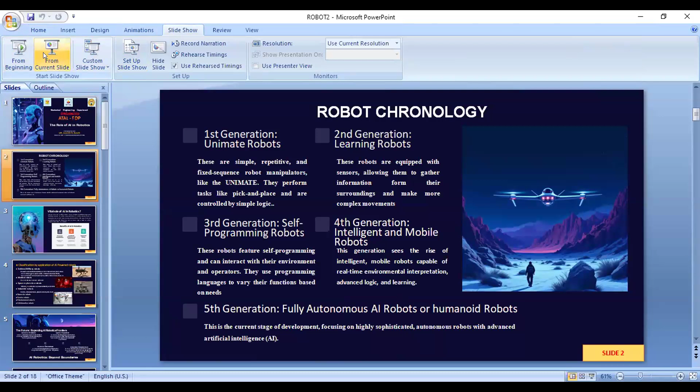In second generation... just one. Hello sir, can you start full screen mode? Yes yes, just one minute. Now is it visible? Yes sir. Okay.

Now in the second era, robots are equipped with sensors, different sensors and actuators. These robots are generally used for tasks like welding and assembly, this work can be performed by these robots.

In the third generation, robots are programmable, in which the robots are self-programmable and operate as per the environment requirement, or they will be able to work with different programming languages.

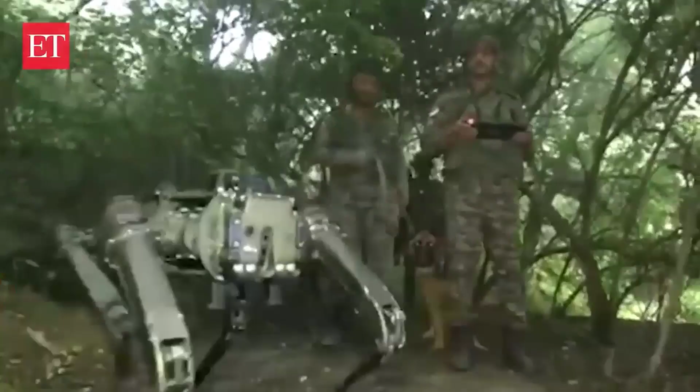I'll give one example: India has recently developed a MULE robot made by the Indian Army, and they conducted one mission. This mission was done in Jammu and Kashmir, where these robots were used for surveillance purposes. These AI robots can visualize in 360 degrees, and they are able to communicate with other robots. These robots even created a map of where terrorists or these people are located, so the military can easily find out the terrorists and make attacks and take action on them.

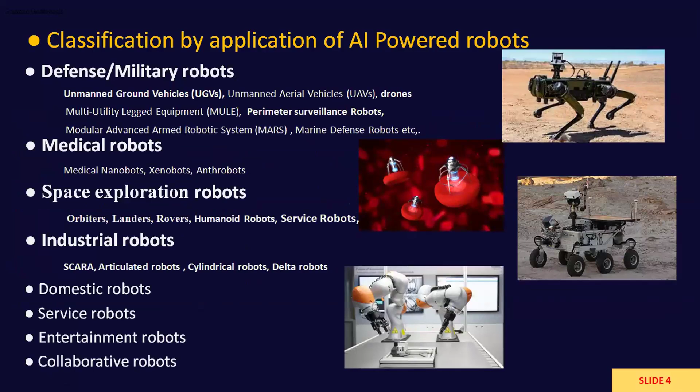This can be done easily by the Indian Army due to these AI robots. These robots that we have seen, called MULE, stands for multi-utility legged equipment. The Indian Army's multi-utility legged equipment surveillance robot uses several AI technologies to enable autonomous and semi-autonomous operations.

Okay, so this is the benefit of AI robots. Even the drones over there can easily make a map of particular areas.

So AI, how AI will be beneficial in military, I have shown in one figure over there. So drone swarm coordination means if you have different drones, suppose 5, 50, 100, 30 drones, they can communicate and coordinate with each other.

Signal analysis is also there. If signals are sent by one surveillance robot to another, or to your central system, that can be easily analyzed. Signals from the enemy can also be caught easily and traced to their stations.

There is object detection and tracking, meaning if there is any object that is different than required, like machines or weapons, that can be easily detected or tracked.

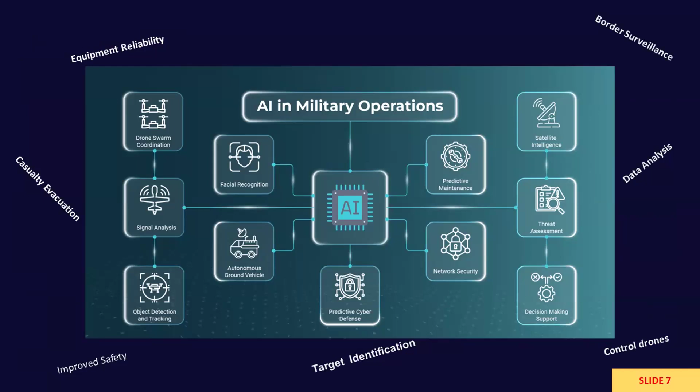And the major thing we'll see in future PPTs is how AI will work in space missions. It is also an important topic we'll cover next.

Now, use of AI in medical. We have already seen that there are three types of bots used in the medical field, the first one being nanobots.

Nanobots are robots made of synthetic material used to create this type of bot, and they are programmed accordingly.

As per the program, they are used for delivering drugs, or for making small operations. These use a top-down manufacturing system, meaning one bot will automatically sense the signal or command it has received, and as per that, the other bots work with it as a team. Typically, nanobots are from 0.1 to 10 micron in size, very small. They measure the area to do different operations with the robotics, and drug delivery is a major application of this robot.

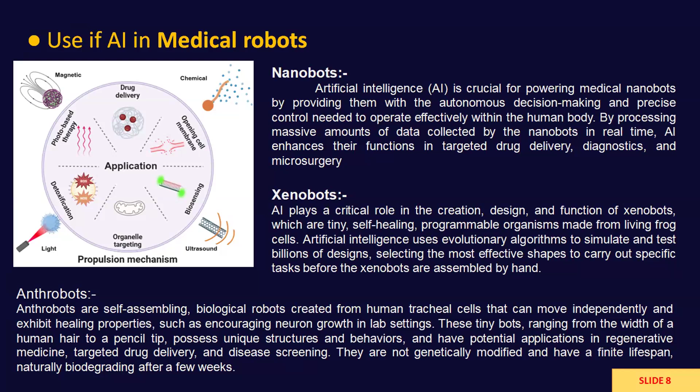Now, as we have seen these two fields, there is one more field where AI robots are majorly used: space exploration. Recently, you may have seen that the Galactic Gearheads robot was developed by some Indian students, from the Pune Institute of Computer Technology, PICT. They won the robotic challenge organized by ISRO, on the topic 'Fly Me to the Mars Mission'. So they wanted to...

...use a LiDAR sensor, or Light Detection and Ranging sensor. So what they did was make one platform about 50 meters by 30 meters, and created a landfill-like mass there. Whatever drone they created, called the galactic gear, works with that LiDAR sensor. Using that sensor, it doesn't need to be controlled through a joystick or program. That AI sensor can directly detect where it should land and from where it should take off. So these things can be done even without needing GPS - that can be done automatically using AI.

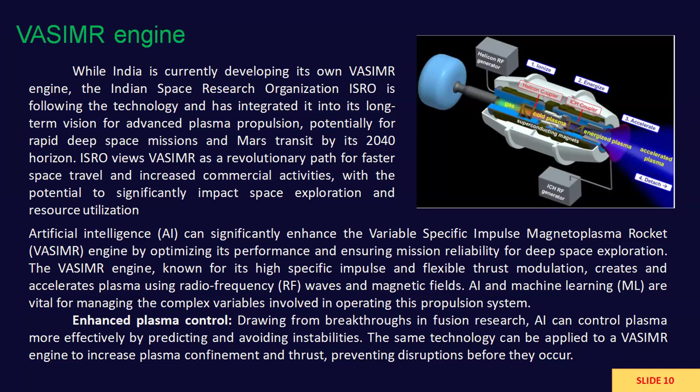Then there is one more thing, ASAT. Many countries are also developing ASAT - it is one type of missile. This missile is called the anti-satellite missile. Many countries like India, China, Russia, and US have developed this type of missile.

It is meant to destroy this type of missile - the anti-satellite missile. This type of missile can directly destroy, from a ground station, any aircraft or even a satellite. So use of ASAT is very useful in the future in the condition of war. ASAT can neutralize the enemy satellite using communication, navigation, and surveillance, disrupting their military operations.

The one drawback of ASAT is this: ASAT generates a large amount of orbital debris. If it destroys the satellite, the rocket will also get destroyed at the same time. At the time of this destruction, a lot of parts will be revolving in space, which is harmful for other satellites and devices in space. So this is the use of these two things in space.

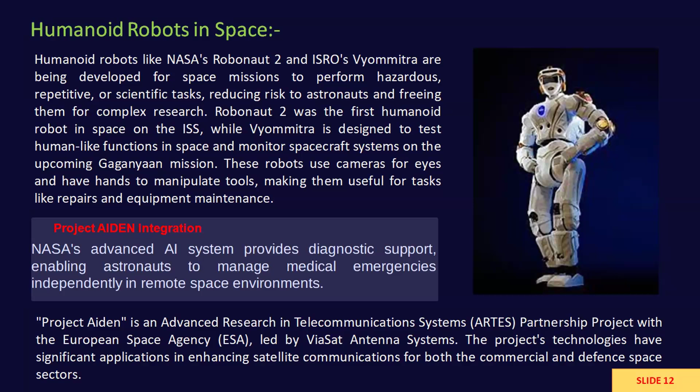Now there are some industrial robots which are regularly used. We have seen the industrial robot, the SCARA robot, which is a Selective Compliance Assembly Robot Arm, the SCARA robot. Then there are articulate robots and cylindrical robots.

Articulate robots work in 6 axes; they can work in 4, 5, or 6 axes. These can be easily used for assembly lines or different tasks. Then there are delta robots.

These types of robots are very useful while working in mines or submarines or in the seas. If there's a requirement, these types of robots can be used.

Now, cobots work combinedly with each other. If you've seen movies like the Rajinikanth movie, he developed robots that work as a team - that's cobots. These kinds of robots do combined work together when a task is very difficult for a single robot, so all the robots come together. Simply, I can give the example of a football match played by robots.

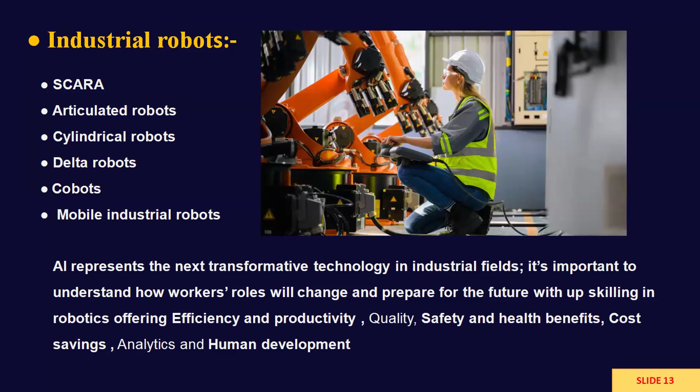Mobile industrial robots are used for transportation of goods and different things. So these are the uses of industrial robots and AI robots that affect productivity, quality, safety, health benefit, and cost saving. Initially, implementing robots in an organization has a very high cost, but compared to continuous work, that cost will be saved. In some places where humans can't work, robots can work easily.

Now, use of AI in CAD design. While designing a robot or any other machine, first we do the model using CAD. Up till now, modeling was done using the conventional way, but now AI has also been introduced in the CAD field.

Previously, if you wanted to convert an old drawn sheet into digital format, people would redraw that sheet in CAD software. Afterward, software emerged for raster to vector conversion - first you scan the sheet, then import it into vectorization software, remove unwanted data, and then there's a process of converting it to digital format.

We can call it a digitization thing. That can be done using previous methods, but while using AI, you just have to give that drawing to an open source AI software and it will automatically convert it into a CAD drawing. Just an example, suppose you have taken a photo from your mobile and convert that to PDF format. It is that much easy that your drawing, whatever it is, even hand drawn or an old sheet that you're having with you, just use AI, take a picture of that, and the software can easily convert that drawing.

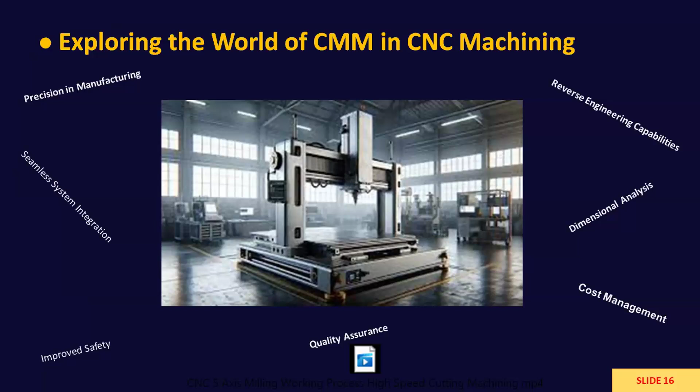So this is the benefit of your CMM and CNC machine with AI. Now, there are still some ethical challenges while using AI with all these things. There is the risk of cybersecurity, meaning there is a chance your data can easily be hacked or stolen by any other person. There is no way to prevent it.

Then there's ethical decision making. Sometimes what happens is anyone asks the AI system for something, so it will give its decision, whether it is fair or convenient or not. It will give its decisions over there. So it is very difficult to take the decision at that time.

Then even data security is there, which is difficult. There is no moral responsibility. Suppose any work is assigned to a person, what he says is, I haven't done anything, AI has done that thing. So there is no moral responsibility while you are using AI.

Then unsatisfied action. Suppose you want to ask the AI to do this thing or manufacture this thing, but it will give you something different as an answer. So many times it is difficult to get a satisfied result. Then responsibility and fairness are things we can control while using AI.

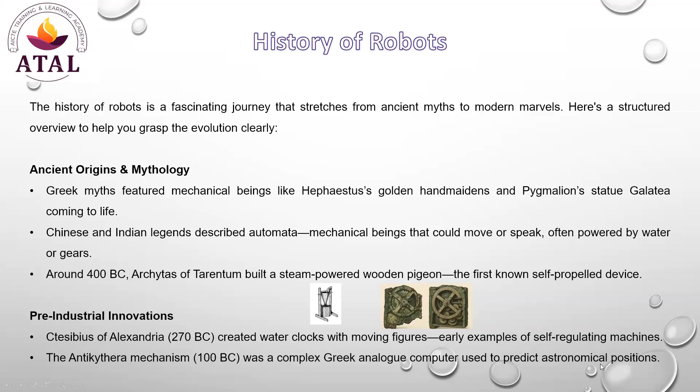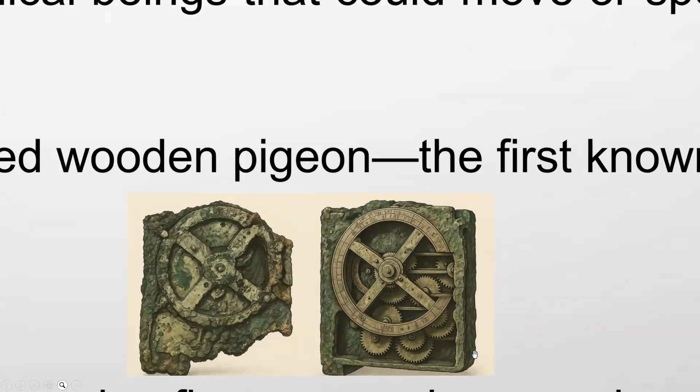The Antikythera mechanism, introduced around 100 BC, was a complex Greek analog computer used to predict astronomical positions. Here you can see that one. This is what scientists found at the time of digging, and they predict this might be how it was manufactured. This is used to calculate the years.

Then after that, in the time of the industrial revolution, the 18th and 19th centuries saw the rise of mechanical automata in Europe, clockwork dolls and musical machines. Meaning whatever we used to play with at our early young stage, the self-propelled doll that we used to play with after winding the coil in that machine.

Then there is an introduction of electricity and motors. With electricity and motors, the machines became more functional, which paved the way for industrial automation. In the 20th century, the word robot was coined.

It was coined in 1920 by Czech playwright Karel Capek in RUR, which is Rossum's Universal Robots, meaning forced labor - someone who is forced into laboring.

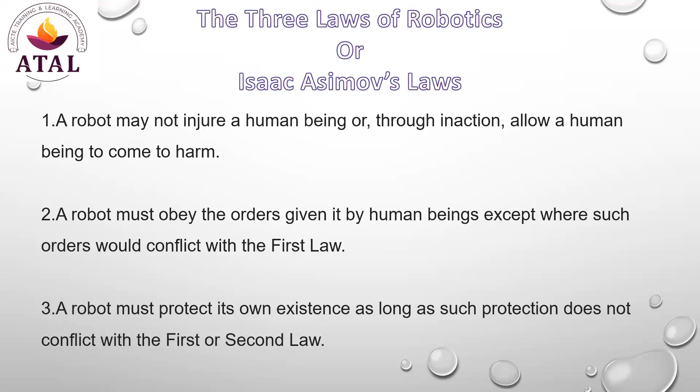The third rule is a robot must protect its own existence as long as such protection does not conflict with the first and second law. Meaning a robot must maintain its existence while working with humans, but it's not allowed to disobey the first and second law.

Then the first ever robot was made, which is not an industrial robot. There is a pair of robots known as Elmer and Elsie, which are electromechanical robots that are light sensitive. You can see here the light sensor part. It's shaped like a turtle, with a transparent cover given.

They were two electronic bots that were built in the late 1940s by neurobiologist and cybernetician William Grey Walter. They were the first robots in history that were programmed to think - they think and move according to the lights.

Elmer and Elsie were often labeled as tortoises because of their shape and the manner in which they moved - meaning it's a very slow robot, not very capable, but they move as per their thinking. They were capable of phototaxis, which is movement that occurs in response to a light stimulus, meaning they respond according to the light behavior.

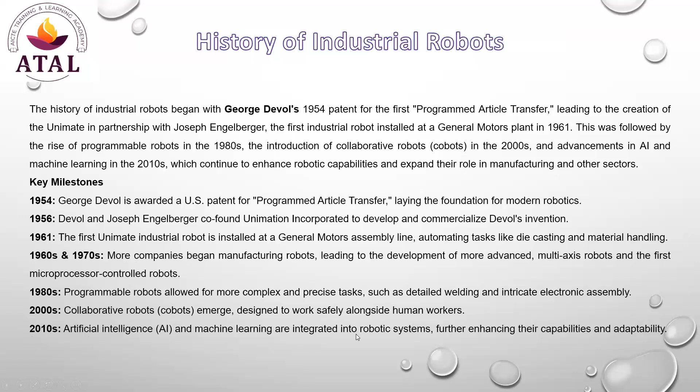In 2000, collaborative robots emerged, designed to work safely alongside human workers. In 2010, artificial intelligence and machine learning were integrated into robotic systems, further enhancing their capability and adaptability.

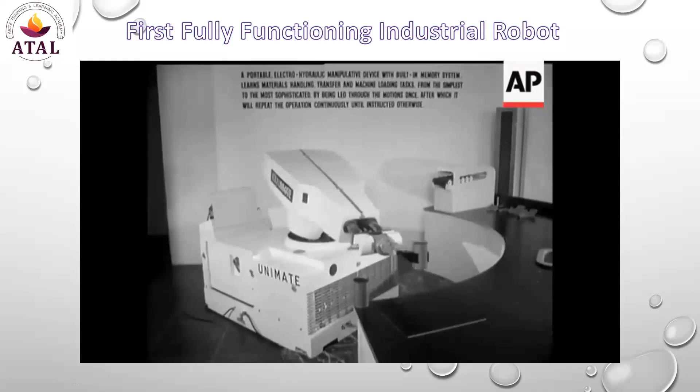You can see the video here. This is from the 1960s, showing the Unimate robot. It works on pneumatic motor control and hydraulics, without much deep electronics. You can see its work and precision, doing precise motions.

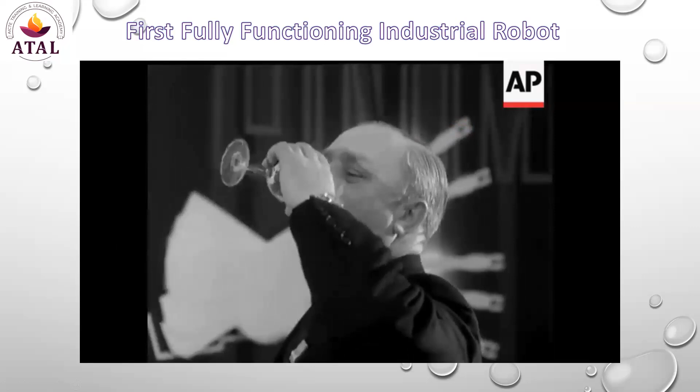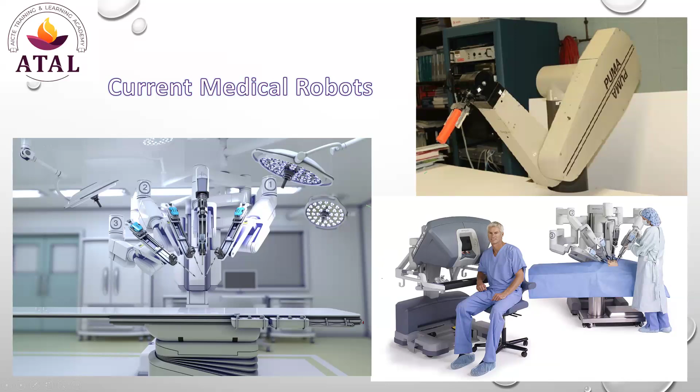And this is the Da Vinci system. Here you can see the Da Vinci system, which is used in the current industrial and medical era, and this is the Da Vinci system, which can be used remotely, meaning the doctor is on one side and the operation happens on the other side.

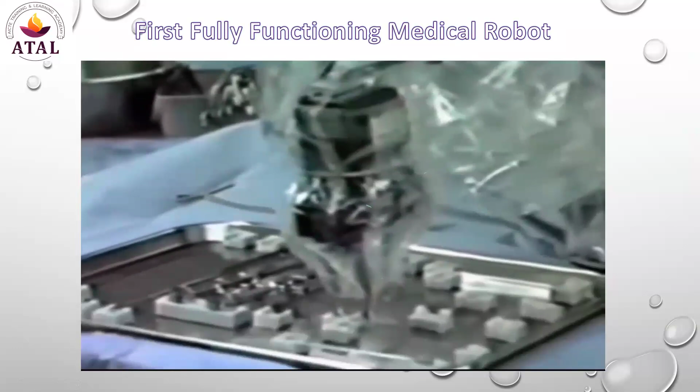You can see the robot is voice controlled. They call the tool's name, and that robot is giving the tool to the human.

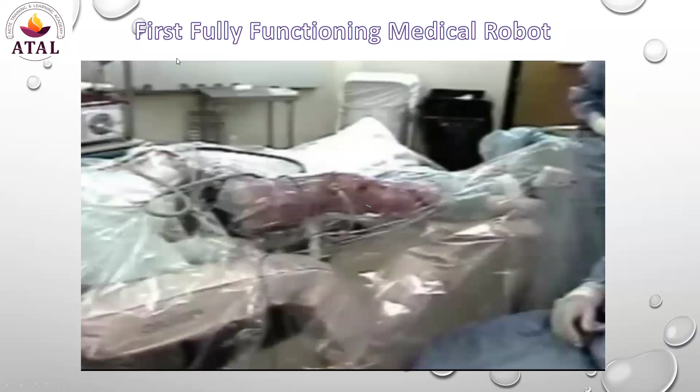Okay, then the current advancement in medical robotics: the world's first intercontinental remote surgery was recently completed over 8,000 kilometers, occurring in June 2024, when the Chinese

The procedure, which had a latency of just 135 milliseconds, was enabled by 5G network and fiber optic connections, allowing near real-time control of the robotic arm in China from the Italian capital. The groundbreaking telesurgery event demonstrated the potential for experts to extend specialized care to remote areas and is seen as a major step forward for minimally invasive surgeries.

The key details are: the surgeon is Professor Zhang Xu, Director of Urology at the People's Liberation Army General Hospital. Location: surgeon in Rome, Italy, patient in Beijing, China. Date is June 2024. Procedure is a live transcontinental remote robotic prostate removal. Technology utilizes a high-speed 5G network and fiber optic connections. It achieved a low latency of only 135 milliseconds, ensuring precision. Significance: marks the world's first successful transcontinental telesurgery, highlighting a new era for remote and collaborative surgery applications.

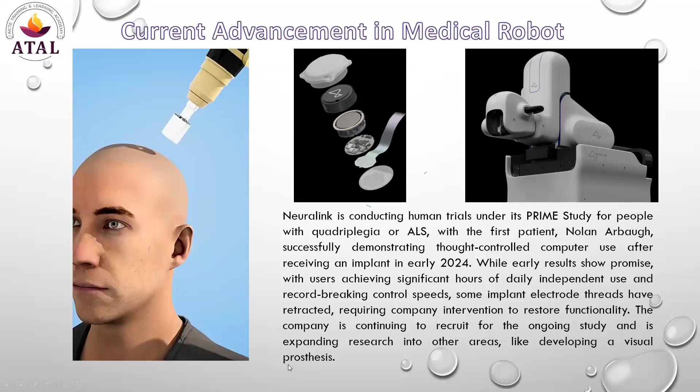with users achieving significant hours of daily independent use and record-breaking control speed, some implants' electrode threads have retracted, requiring company intervention to restore functionality. The company is continuing to recruit for ongoing study and is expanding research into other areas like developing visual prosthetics. You can see the video here.

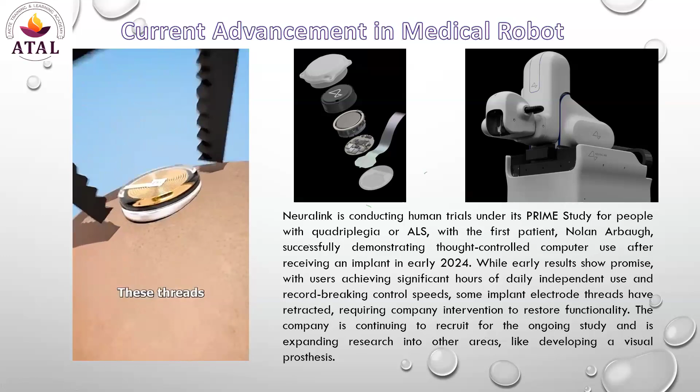This is a special robot developed for implanting these threads, which are placed near your neurons. So this is the robot used for that.

Then we are moving forward with military robots. The history of military robots is the history of defense robots, beginning with remote control devices, like Germany's World War II Goliath tracked mine, followed by the Cold War's CIA-funded aerial vehicles for reconnaissance. Early examples include the World War II Kettering Bug,

aerial torpedoes, and Soviet teletanks - these are the robots' names. Modern military robotics have evolved from these precursors.

With the 2002 war in Afghanistan, making the first use of ground robots like Hermes in a combat zone for tasks such as mine detection and cave clearing. Ongoing advancements focus on increasing autonomy, such as the 2020 incident where a Kargu drone attacked a human target in Libya, highlighting the complex ethical and strategic considerations of autonomous weapon systems.

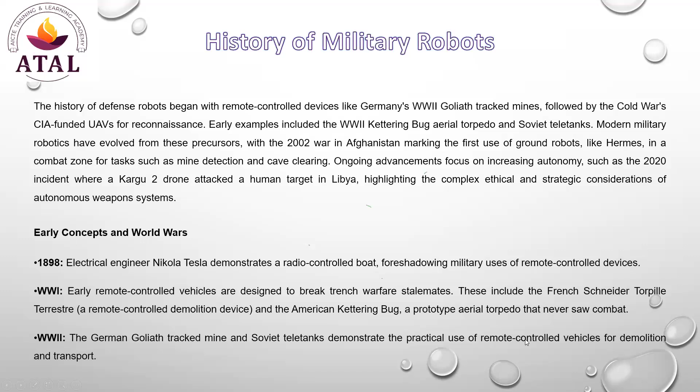In World War II, the German Goliath tracked mines and Soviet teletanks demonstrated the practical use of remote control vehicles for demolition and transportation. In the Cold War era, the CIA invested in the concept of unmanned aerial vehicles for intelligence gathering in dangerous environments.

The Firefly drone, developed in the 1960s, became the first drone to conduct significant reconnaissance missions. In the late 20th century, robots began to be used for support and reconnaissance, with ground robots like the MARCbot being developed for tasks such as bomb disposal. In the modern era, in 2000, the Hermes robot, along with other prototypes, made the first use of land robots in ground combat in Afghanistan.

In 2010, military investment in robots increased significantly, developing continuous advancement systems including unmanned aerial vehicles equipped with missiles and large ground robots with enhanced mobility. In 2020, Kargu-2 drones from Turkey reportedly attacked a human target in Libya, potentially making the first autonomous lethal engagement by a robot. Right now, the focus has shifted to developing more autonomous and sophisticated defense robots, raising ethical questions about their use in warfare and increased investment in this rapidly growing sector.

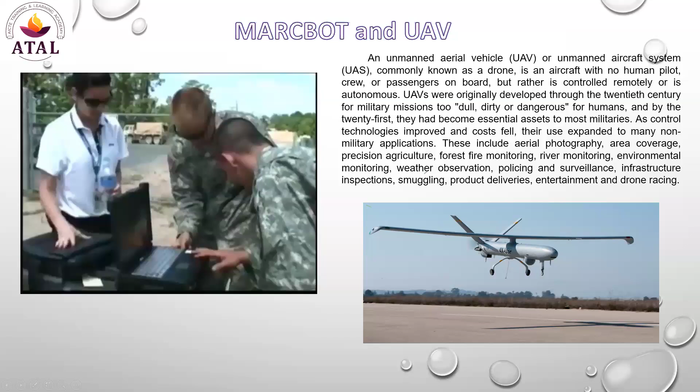An unmanned aerial vehicle system, commonly known as a drone, is an aircraft with no human pilot, crew, or passenger on board, but rather controlled remotely or is autonomous. UAVs were originally developed through the 20th century for military missions too dull, dirty, and dangerous for humans, and by the 21st century they had become an essential asset to most militaries as control technologies improved and cost fell.

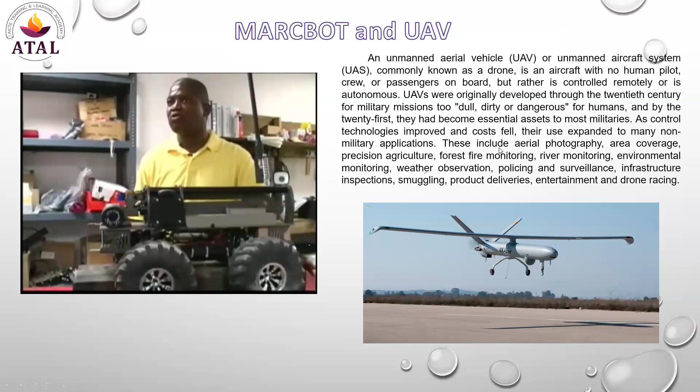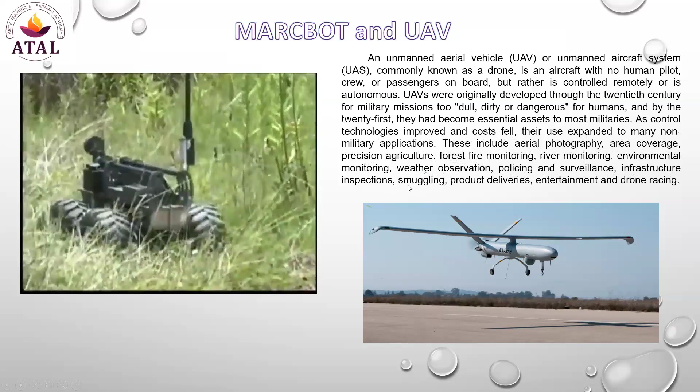Their uses extend to many non-military applications. This includes aerial photography, area coverage, precision agriculture, forest fire monitoring, river monitoring, environment monitoring, weather observations, policing and surveillance, infrastructure inspections, smuggling, product delivery, entertainment, and drone racing.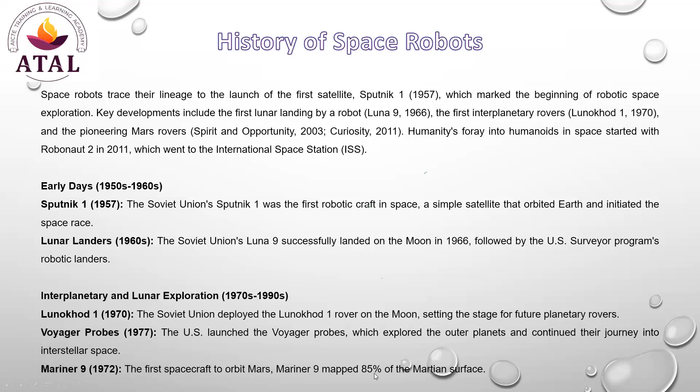Then interplanetary and lunar exploration from the 1970s to 1990s. In 1970, the Soviet Union deployed the Lunokhod 1 rover on the moon, setting the stage for future planetary rovers. Then the Voyager probes were deployed by the US, which explored the outer planets and continued their journey into interstellar space. Then Mariner 9 in 1972 was the first spacecraft to orbit Mars, and it mapped 85% of the Martian surface.

Then the Advance rover and the humanoid robots. The Mars exploration rovers in 2003. You can see this is the Spirit rover here, designed by NASA.

The Spirit and the Opportunity rover revolutionized our understanding of Mars by analyzing the rocks and searching for signs of water.

Then the Curiosity rover, which was launched in 2011 by NASA. The Curiosity rover continues to explore Mars, providing data on the geology and climate. You can see the second photo of the Curiosity rover.

Then Robonaut 2. This is Robonaut 2, the first humanoid robot in space, sent to the ISS, International Space Station, to test its capability and begin its life in space.

As a torso-only unit, they received the legs in 2014. The second version is a torso which got the legs. This is the half humanoid robot.

Then ISRO started working on the Vyommitra. The Indian Space Research Organization is developing Vyommitra, the female humanoid robot, to support human space flight, monitor modules, and interact with the astronauts. You can see ISRO's Vyommitra here.

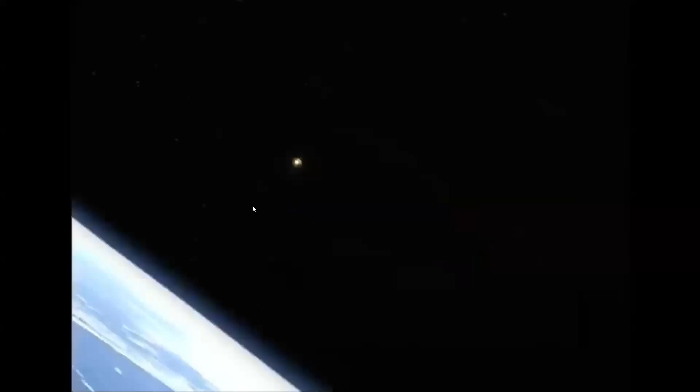So sir, as the first stage is removed, the satellite gets opened. Then it moves forward for another stage separation.

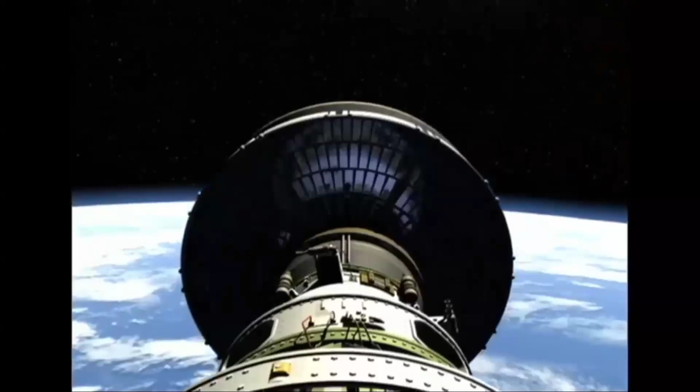Then after getting velocity, this satellite goes towards Mars. After 7 months later, the parachute and protection were automatically deployed.

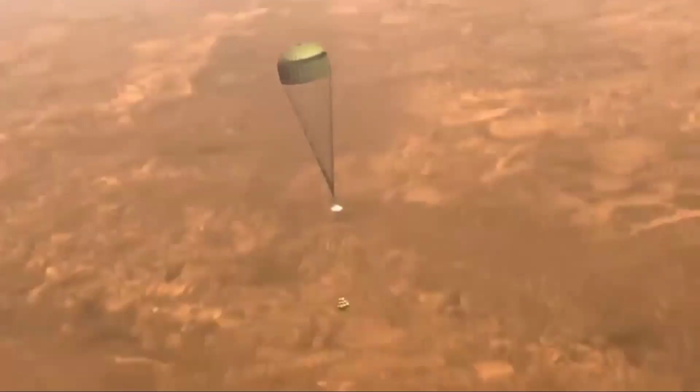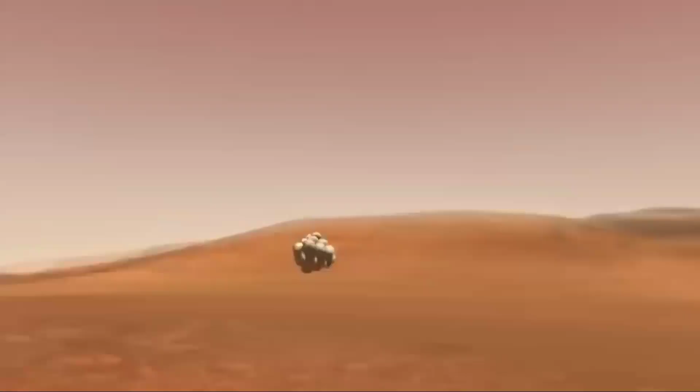From there, it started its journey. I am forwarding that.

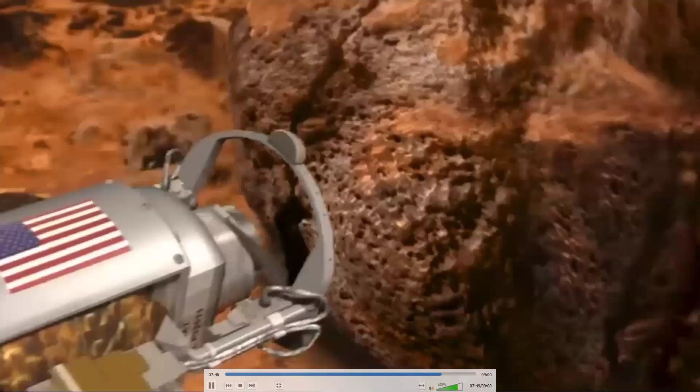There is spectroscopy, which is used for analyzing the contents in the rocks, what minerals are there. Generally, spectroscopy is used in industry for analyzing the chemical composition of metals and sheet metals.

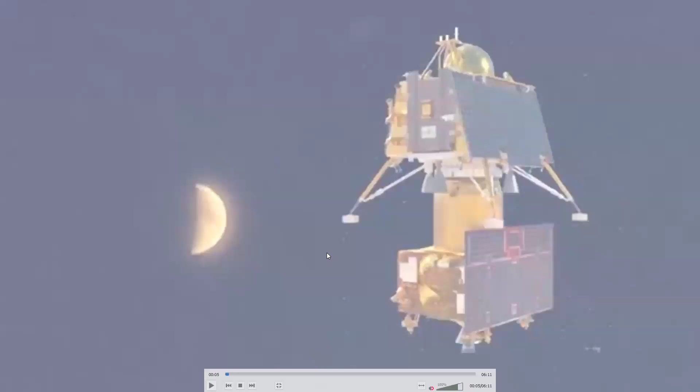Which is the Chandrayaan's landing video. Is it visible, sir? Yes, sir.

This is the landing of Chandrayaan 3, which we might have already seen on television. This is how Chandrayaan works and how it goes there, how it lands, how it projects itself to land safely.

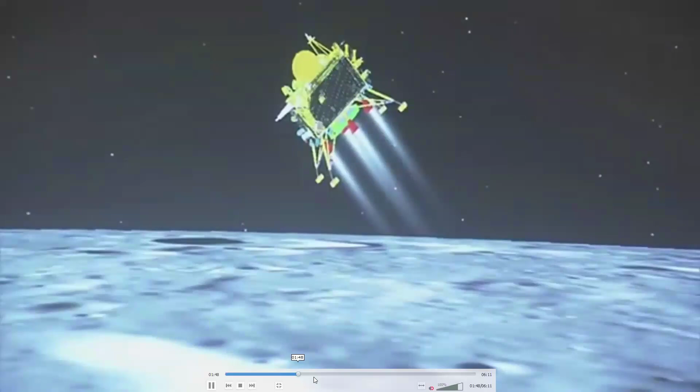Then this is the Chandrayaan rover, and this is their cabin. Chandrayaan scans the data available. These are the parts of Chandrayaan.

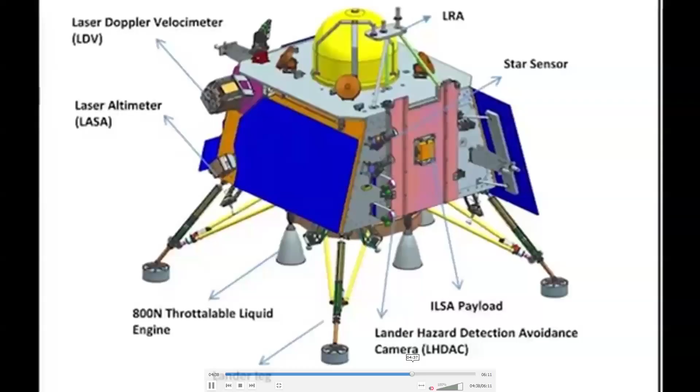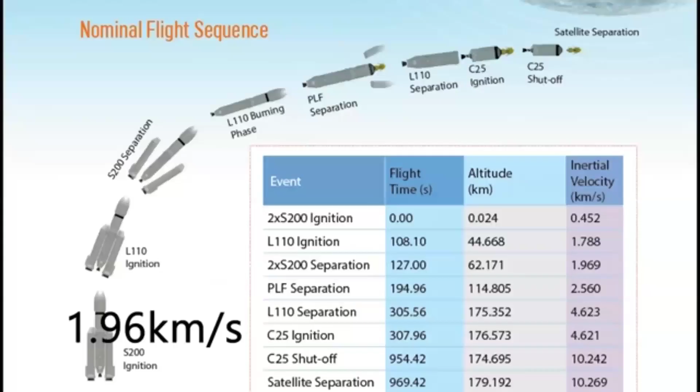This is the live telecast, showing the separation of the rocket stage, by the ISRO people.

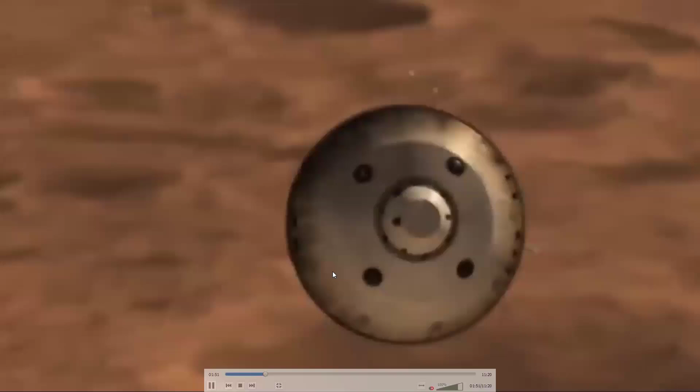This is the landing of the Curiosity rover. I have fast forwarded here.

This is the Curiosity robot by NASA in space on Mars.

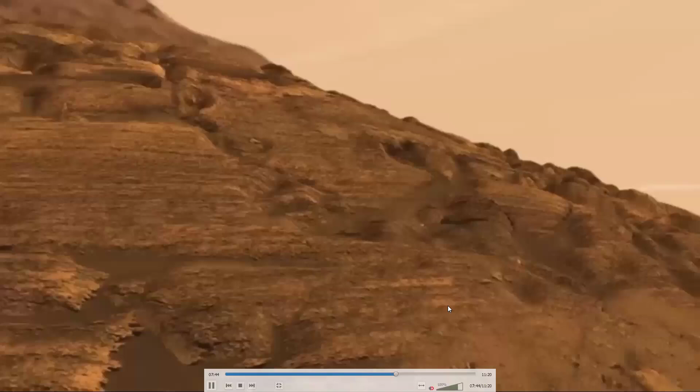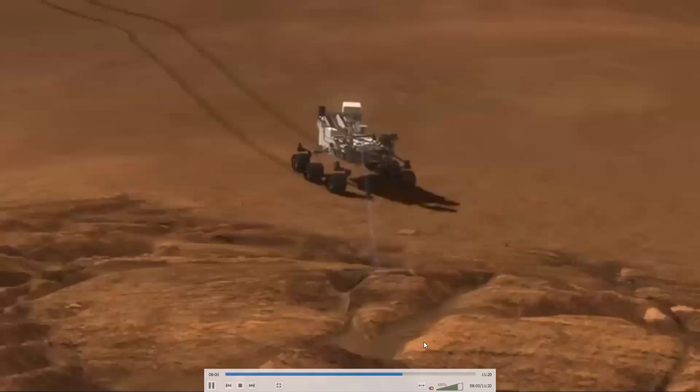This robot sends pictures to NASA of Mars. This rover also has high quality sensors for analyzing and studying Mars.

I'm switching off that video also right now. These are the space robots. What we are using in our system, I'm going to show you.

So this is the robot we use in our factory at the Star Coolers. You can see this is the welding robot with a joint. We manufacture the heat exchanger that requires circuiting, meaning the looping of the liquid refrigerant or cooling media.

We have to introduce the fin inside these tubes, and after insertion of the fins, we require to expand that tube. After expansion, we have to connect these tubes using a bend, a U bend or C bend, as per the circuiting given by the customer or suggested by our application.

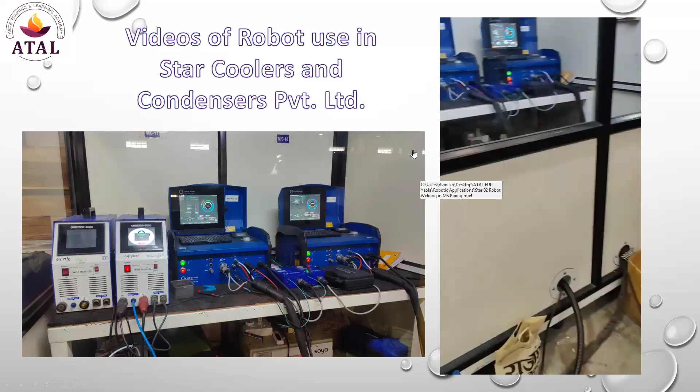We have four boards, used for the welding. They automatically adjust the argon pressure and the current as per the chemical composition of the tube material. This is the locking mechanism, with sensors, chilling medium and all. Once it started, you can see the dial here.

What I zoom in on, this started the welding over the tube area. This is the starting phase, then this is the secondary phase. This is the welding and joining of the two metals, and this joint is completely sealed without any kind of problem.

We used to check our tubes at 400 psi pressure, that much precision is required. So this is the completion of the welding.

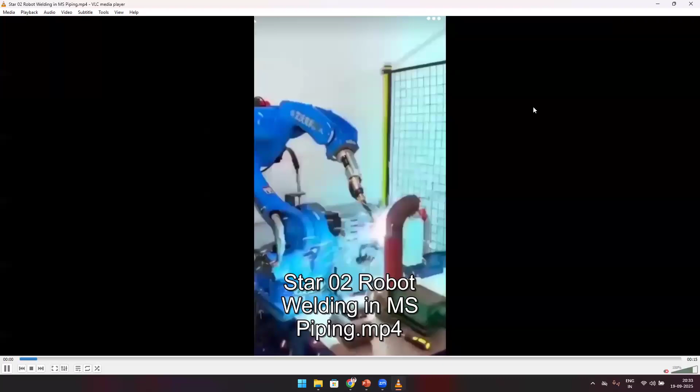We also had a second robot used for bigger pipe joining. Are you able to see the video, sir? Yes sir, yeah. We use this kind of robot for the header welding.

These tubes are connected to a single bigger pipe, and we require to close one end and open the other end for the refrigeration inlet and outlet. So we use this kind of robot. These two robots are present at our factory.

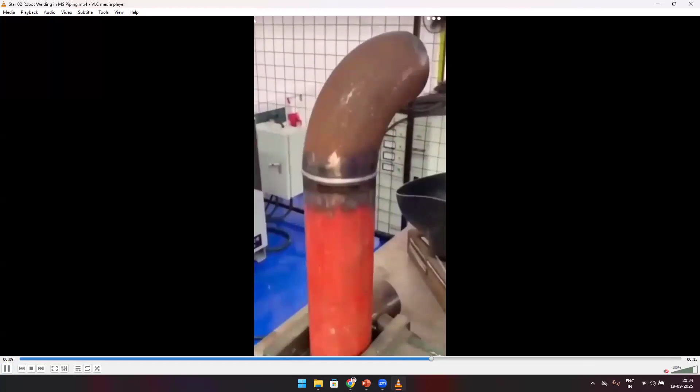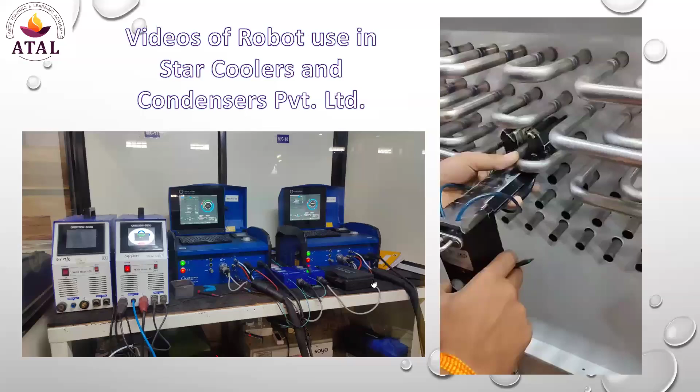I had some videos about the BMW car manufacturing. You can see here, these are the robots used in the industry.

This one is the pick and place robot. This robot is used for bolting the hinges of the bonnet. This robot uses a fastening mechanism. This video is also too long, which takes about 15 minutes.

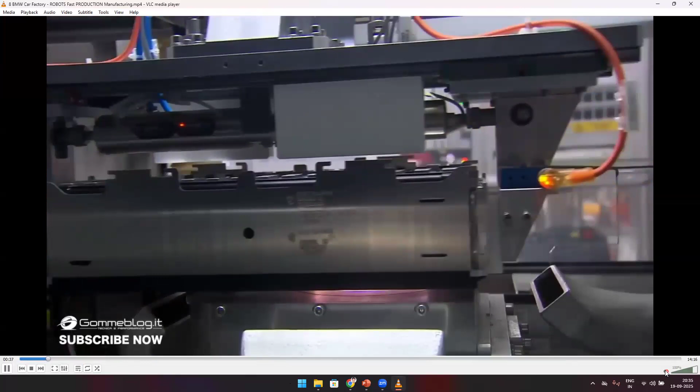This is the deionization of the sheet metal or any plastic parts, because this is not allowed to have ionized charge while using the electronics.

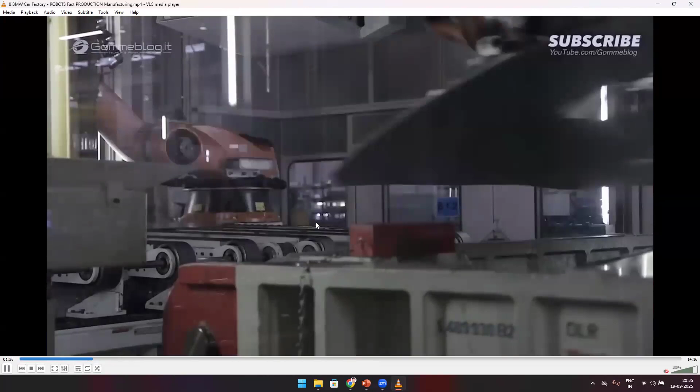At some point I will fast forward this video. You can see the pick and place robot, which places the sheet, and also the second robot used to lift the formed structure or sheet metal form.

Here you can see the welding robots joining parts. In some industries they use welding, some use riveting, some use spot welding also. Even now, some use sheet metal joining glue or adhesives.

You can see these are industrial robots. They require their own working area, and no human is allowed there. Fencing is completed behind these robots for their working area.

They are guarded with the fence so no human can be harmed by these robots. Here you can see this robot applying the sealant and sheet metal glue precisely.

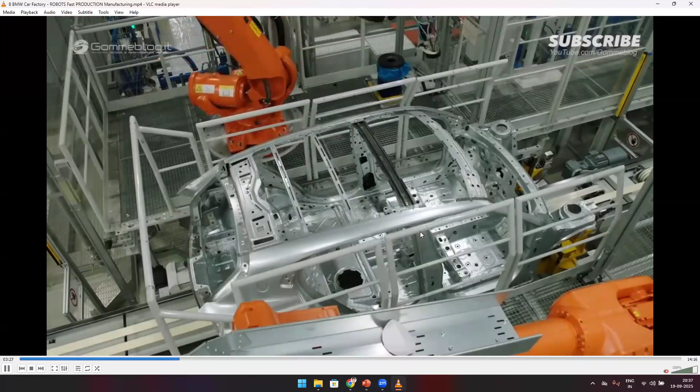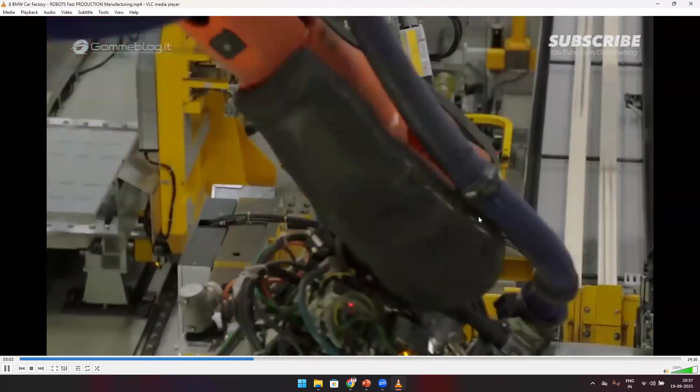Then this process is completed. These are the spot welding robots. You can see the two ends of the spot welding. Once the operation is done, they go to their home position and the fixture is removed.

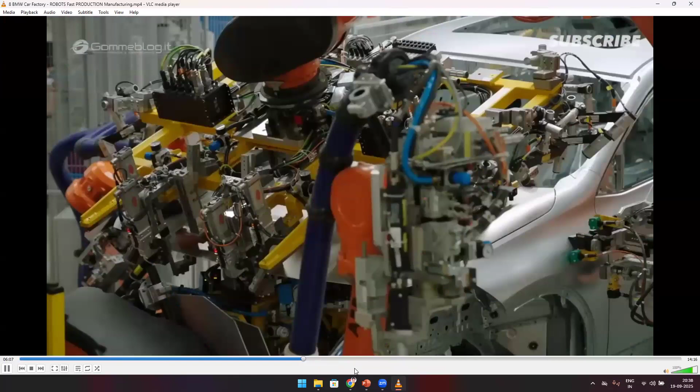As in the assembly line, I am moving forward through some parts. Here you can see the fastener robot. They mount the hood.

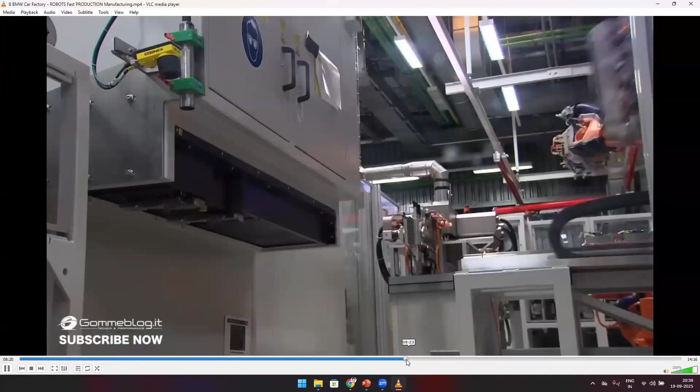This is the electrical vehicle. You can see the battery pack there. That's why that deionization work was already completed, which we saw earlier. I'm just fast forwarding it.

This is the engine scanning. They are manufacturing the engine using robots, and they scan the engine to check if it is perfect or not.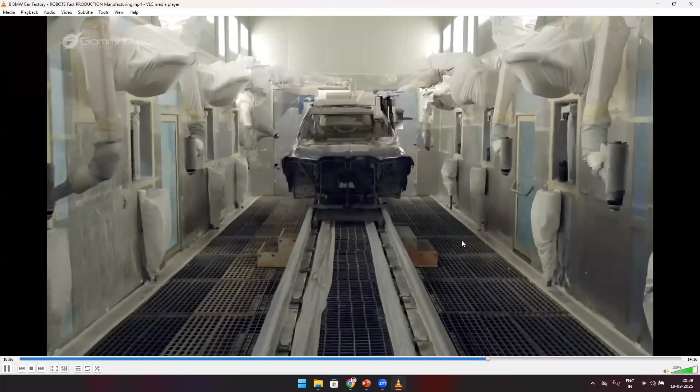You can see there are the coloring robots. They apply an even coat in this area. These robots save on the paint. Each robot has been given a specific area.

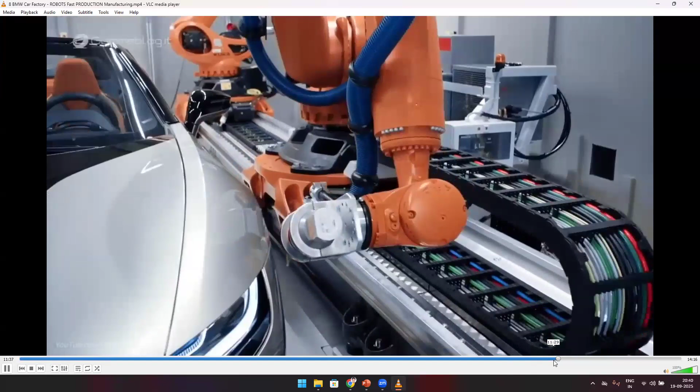This is the measuring robot. They are measuring the quality of the product.

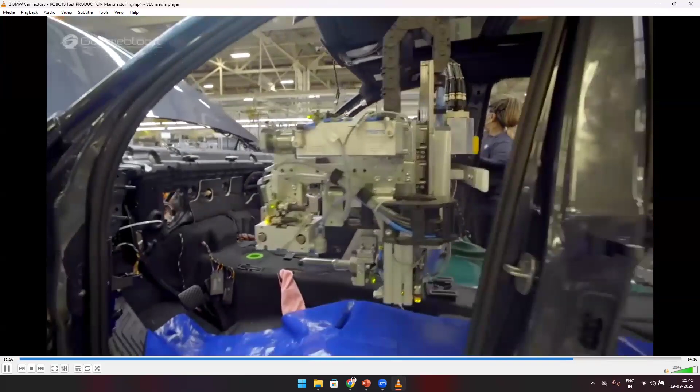You can see there are the logistical robots which transport the dashboard of the vehicle whenever required. They work autonomously, using a sensor-based interface to communicate with each other and with the assembly line, about which part is going to be required and when.

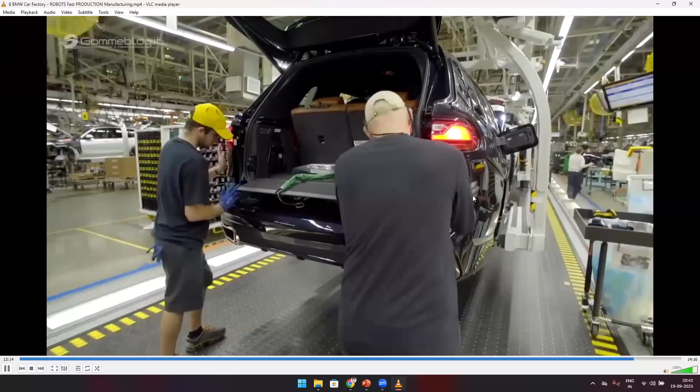These automatically adjust the position of engine mounting. This is the unification of the powertrain and the body of the vehicle. In industrial or automobile language, they call it the marriage, because here the body gets the power from the powertrain and the vehicle is complete.

This is quality checking of the vehicle, and so on. So this is the BMW report.

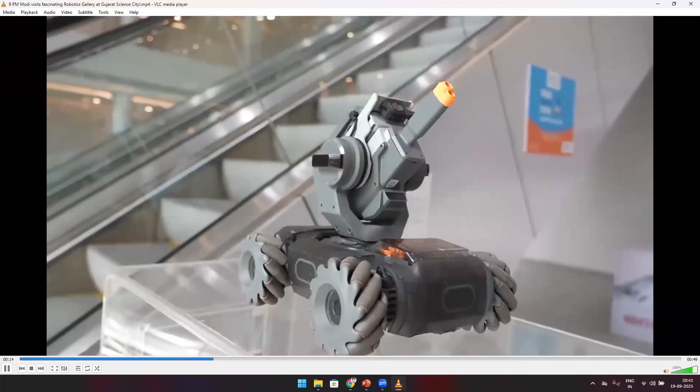Recently, our PM, Honorable Narendra Modi ji, visited the Gujarat Science City, where they completed the Gujarat Robotics Gallery. You can see these are the humanoid robots, toy robots, 3D printers, service robots. These are toy robots also, as well as all-terrain robots, useful for defense as well as home uses.

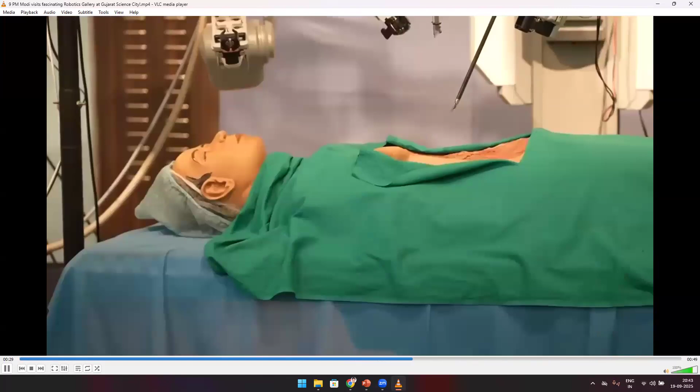This is a climbing robot, surgery robots, home domestic use robots, industrial robots. Many types of robots are there.

I'm going to show you the precision of the medical robots. Like this, you can see. This is the Da Vinci system, which we already discussed. The operator is on that side and he is doing a surgery on this side. This is so precise that he is peeling a grape right now.